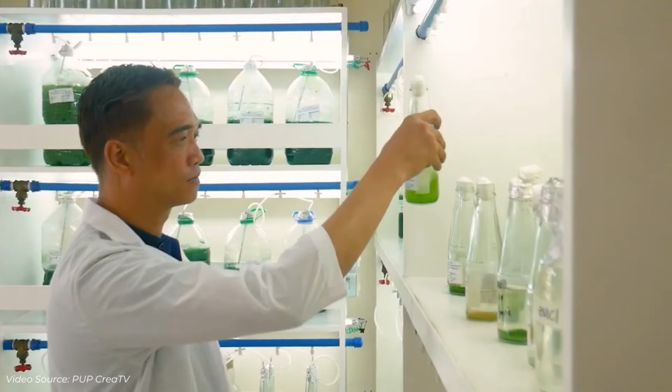However, the increasing number of out-of-school youth and dropouts was already a concern prior to the pandemic, and this issue was only exacerbated by the adoption of online learning as a result of the pandemic. In fact, the school dropout rate for senior high school students increased from 3.9% in 2018 to 6.6% in 2020.

And despite the rate of out-of-school youth decreasing to 20% in 2018 from 22% in 2017, the statistics are still troubling. There are about 16 various SUCs in Metro Manila: UP, PUP, PNU, and TUP to name a few. But there is no state-owned university or college in the northern part of Metro Manila.

In fact, the nearest SUC satellite branch to Caloocan City is PUP Quezon City, located in Don Fabian, Quezon City, while the nearest SUC main campus is UP Diliman in Diliman, Quezon City. To reach these state universities, you must traverse Commonwealth Avenue, which is notorious for its severe traffic, robbing students of hours they could have spent studying or resting.

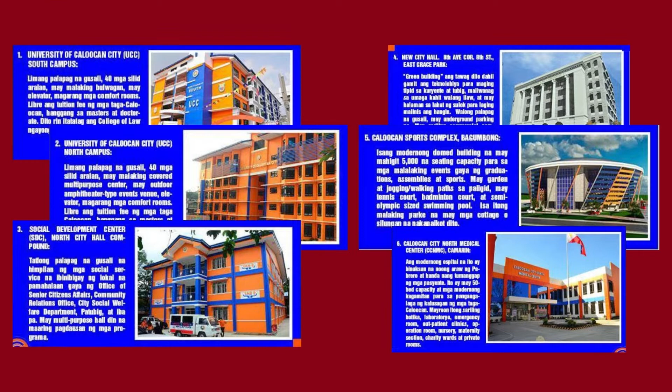As the client for this proposed project, the local administration of Caloocan City has continuously constructed initiatives that prioritize the needs of the people. Given that the major author of RA 11785 is also the current mayor of Caloocan City, it is almost certain that the objective and vision of the PUP Caloocan City North proposal would be fulfilled.

The project will focus on architectural programming and design solutions adhering to the related design guidelines and standards imposed by the law and CHED, with senior high school graduates, out-of-school youths, and college dropouts in the Kamanava area as its main beneficiaries. The project limits itself to the planning and designing of a state university and will not cover any structural, mechanical, electrical, sanitary, and other related engineering aspects unless needed for the architectural solutions.

The proposed site is a 14,660 square meter lot located in Congressional Road, a major road that connects to Camarin Road and Saranay Extension. Its primary modes of transportation are private vehicles, motorcycles, and tricycles.

Currently, there is only one jeepney route that passes through this road, but improvements regarding this matter are already planned by the local government.

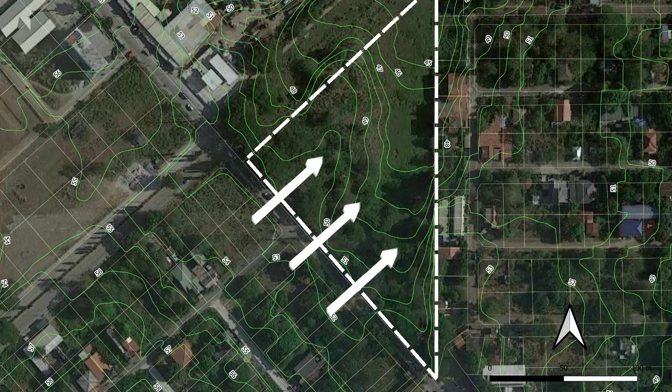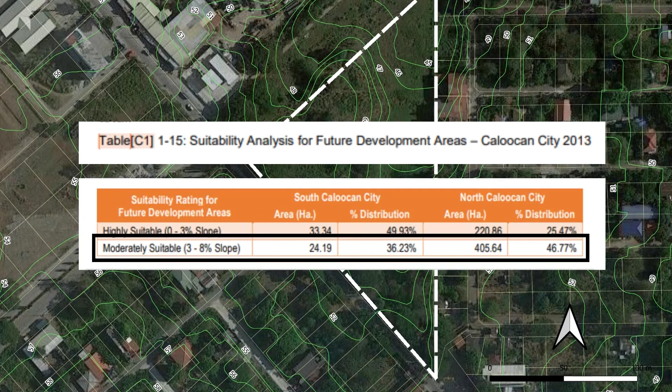The site is also near other educational institutions and residential areas, so accessibility and businesses that will supply the needs of the students will not be a problem. The lot has a gradual 6% slope downward from the major road and has low susceptibility for flooding. According to the suitability analysis for future development areas of Caloocan City LCCAP, the site falls under the moderately suitable rating. Its frontage is oriented southwest, which is utilized in the planning process. Various vegetation are also placed as a noise buffer from the neighboring settlements.

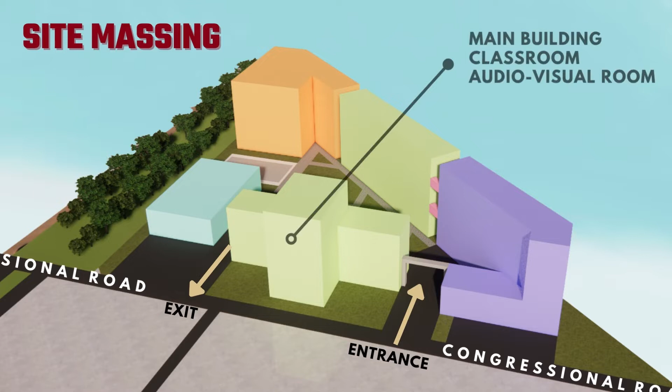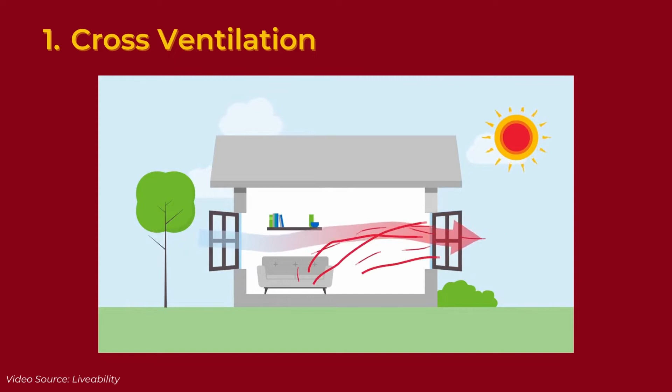The quality of air within the classroom is one of the most important factors to consider. Students' ability to concentrate is impaired when exposed to poor air quality, which also has the potential to harm their health. To fully utilize the natural ventilation of the site, cross-ventilation is applied. This is a natural cooling technique in which openings are positioned on opposing sides, allowing cool air from outside to enter while warm air from inside exits.

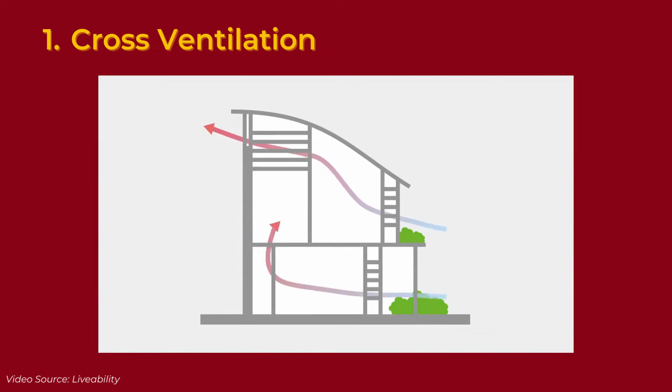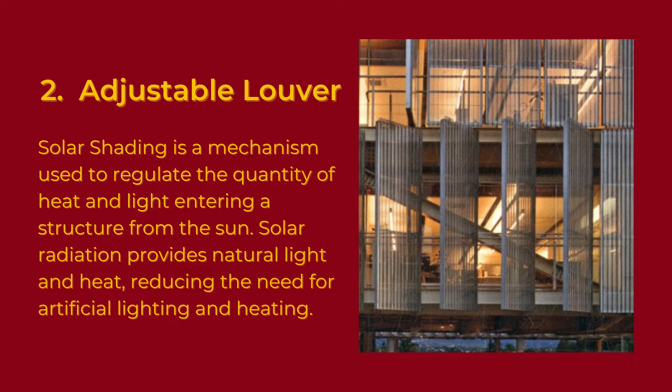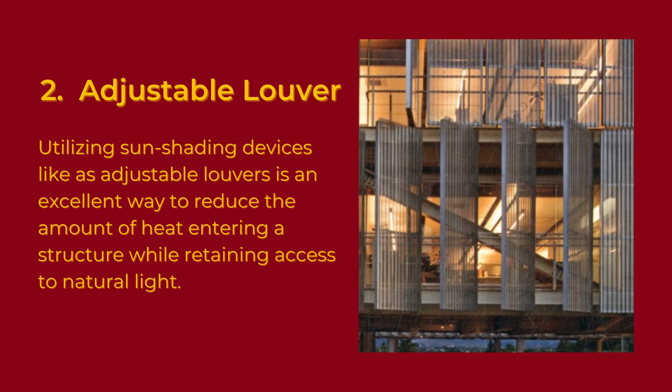Utilizing the lot's orientation to ensure the structure receives the most natural light is an effective way to save money on artificial lighting, but it also has drawbacks, particularly in the Philippines, where the heat can sometimes be too intense, affecting the comfort of occupants. Utilizing sun shading devices like adjustable louvers is an excellent way to reduce the amount of heat entering a structure while retaining access to natural light. In addition, louvers allow wind to pass through, enhancing ventilation in the building.

Rainwater harvesting is a technique of collecting and storing rainwater for reuse, as opposed to having it flow off, be absorbed by the soil, or routed into drains, streams, or rivers. Due to the large number of students, schools consume a great deal of water. Therefore, installing this system can help minimize the consumption of potable water and increase the use of rainwater.

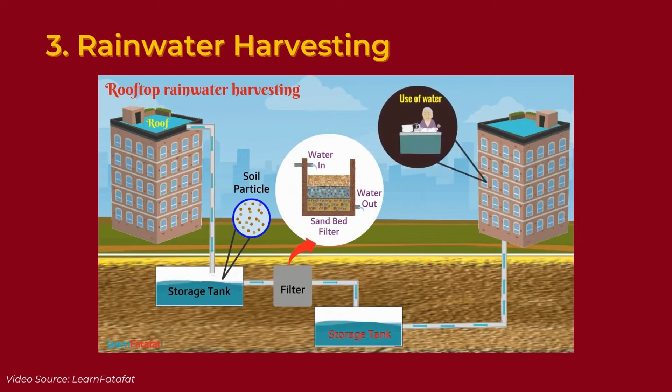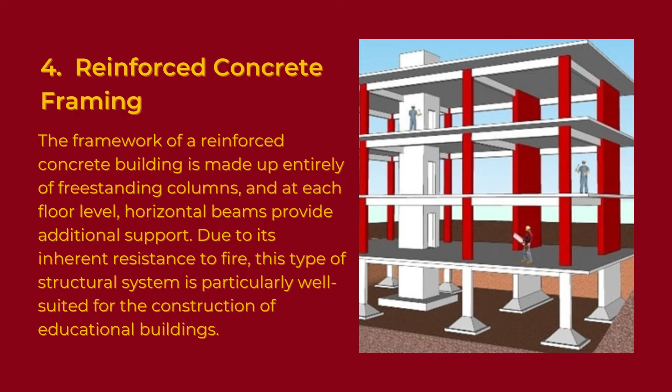The framework of a reinforced concrete building is made up entirely of freestanding columns, with horizontal beams at each floor level providing additional support. Due to its inherent resistance to fire, this type of structural system is particularly well suited for the construction of educational buildings, which typically house a large number of students and teachers, making structural safety and rigidity an extremely vital consideration.

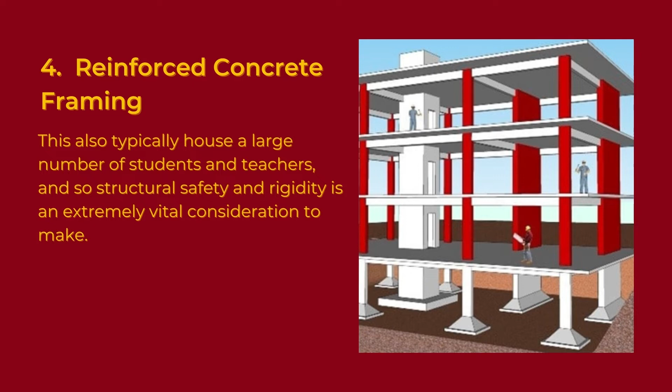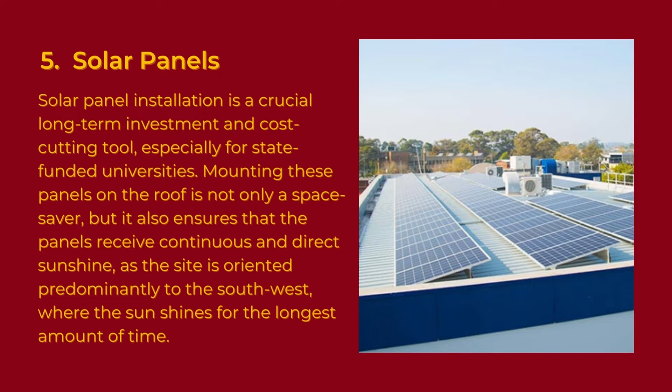Solar panels, also known as photovoltaics, convert solar radiation into electricity that may be used to power homes and businesses. Solar panel installation is a crucial long-term investment and cost-cutting tool, especially for state-funded universities, as it enables the university to redistribute the budget allocated to electricity bills to other projects.

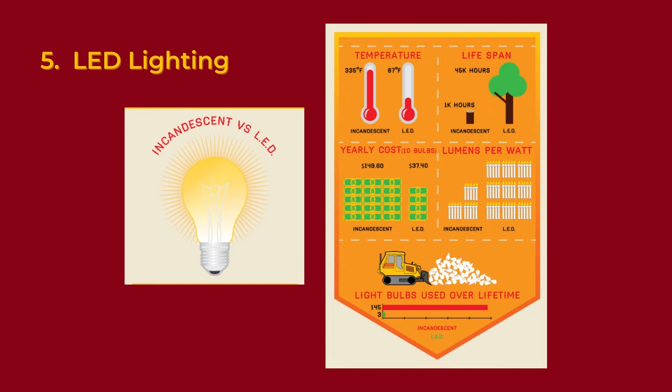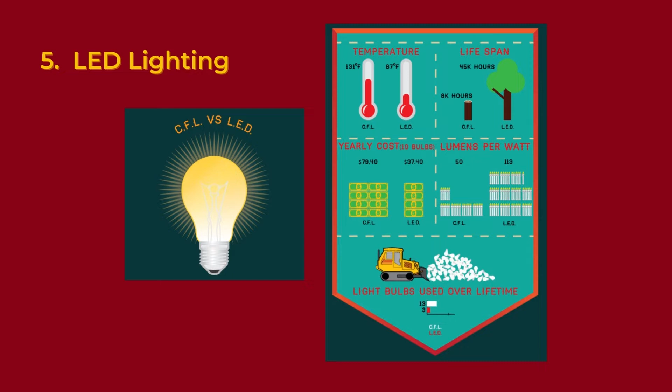A light-emitting diode, commonly known as an LED, is a type of semiconductor device that emits light through the electroluminescence process. The usage of LED lighting as opposed to conventional lighting contributes to a brighter and more comfortable learning environment for students. This is because LED lighting generates very little heat and does not contribute to the room's overall temperature.

An acoustic panel is a sound-absorbing panel that can be used to minimize the amount of reverberation and echo in a room, as well as the amount of background noise. Students can become easily distracted from their classes and lose their ability to concentrate when there is an excessive amount of background noise. Acoustic panels will be installed as a step toward achieving a conducive environment for learning.

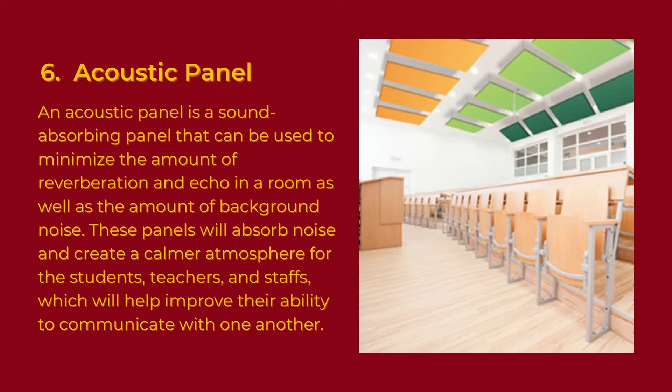Based on the average of the 10-year projected senior high school graduates divided by the 28 existing HEIs plus the proposed PUP-Caloocan City North, there will be about 1,198 students in Caloocan City enrolling in PUP-Caloocan City North. Meanwhile, it is projected that on average, over 300 students from the neighboring cities of Malabon, Navotas, and Valenzuela will enroll in the said university.

Based on the college programs with the highest recorded enrollment in Caloocan City for the past 5 years, PUP-Caloocan City North will possibly offer courses in accountancy and finance, business administration, computer and information sciences, and education, since these are the courses with highest demand in the city.

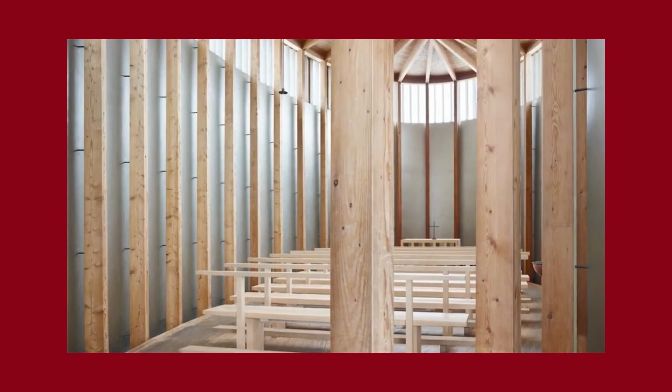Architecture is the art of reconciliation between ourselves and the world, and this mediation takes place through the senses. This project is developed and planned with this philosophy in mind, optimizing the architecture experience by including other senses besides sight.

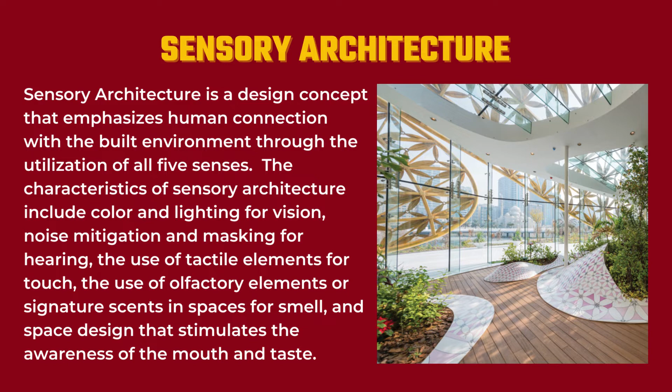Sensory architecture is a design concept that emphasizes human connection with the built environment through the utilization of all 5 senses. This architecture aids in the promotion of social, cognitive, and emotional growth, all of which are crucial in educational institutions. Not only does it help create a more favorable learning atmosphere, but it is also accessible to everyone, including those who have lost a sense, as they may experience the architecture with their other senses.

The form of the main building is derived from one of the symbols PUP is known for, the pylon. The pylon originally stood for true, good, and beautiful. The 3 pillars' positions were rearranged and came up with the form for the main building.

Stramp, or stair ramp, is a great innovation that encourages inclusiveness, particularly for persons with disabilities, as its ramps are not segregated from the stairs that people use but are instead integrated to create community.

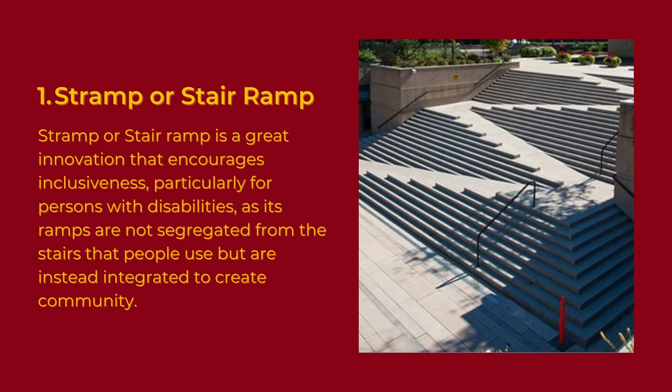Flexible desks also encourage students' interaction by allowing them to effortlessly shift and combine their desks anytime they are grouped or gathered. It also fosters a sense of community among the school, as no student or desk will be left behind because everything fits together.

Innovative napping or study pods shall also be installed in the library to provide students with a peaceful space to rest in the midst of an urban environment. This also promotes brain relaxation, which will help students obtain more focus and revitalize brains for class.

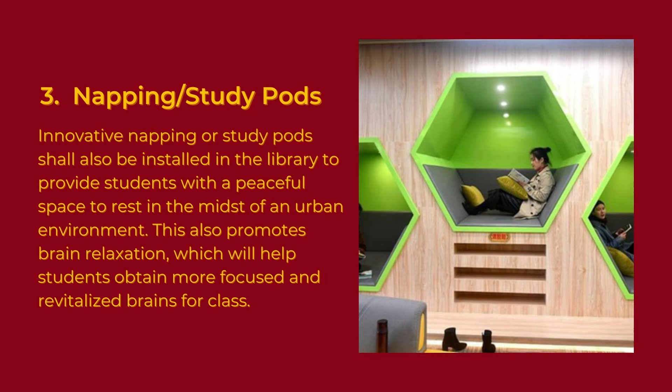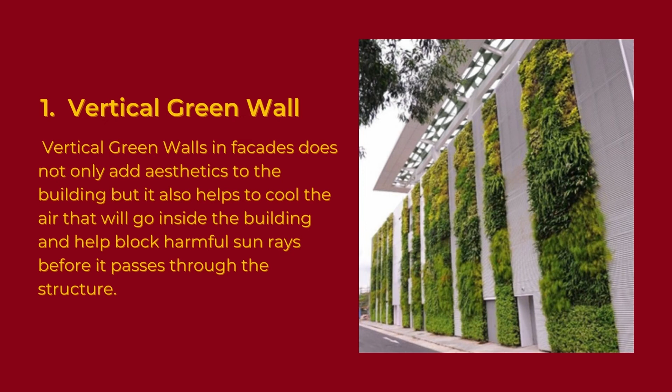One of the highlights of this project is the incorporation of vertical green wall in facades. This does not only add aesthetics to the building, but it also helps to cool the air that will go inside the building and help block harmful sun rays before it passes through the structure.

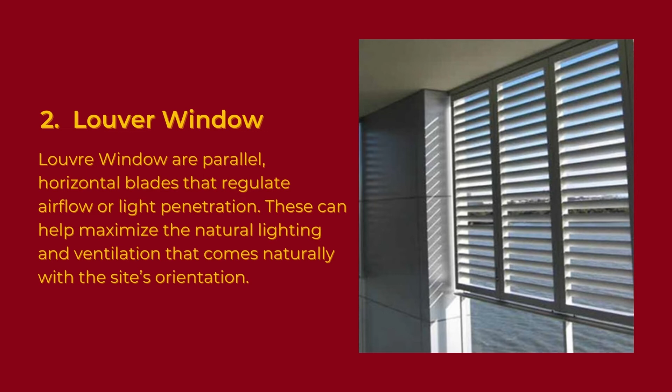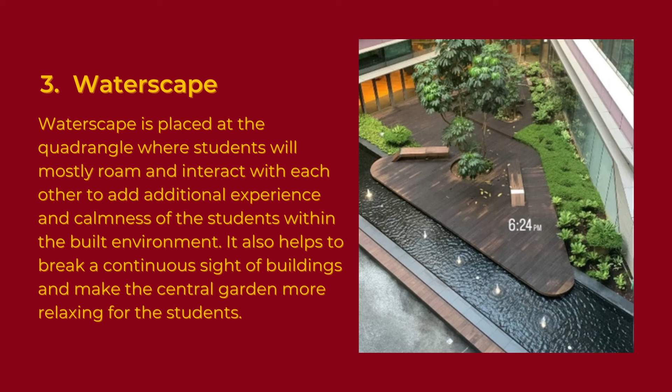Louver windows are also used, as it can help maximize and regulate the natural lighting and ventilation that comes naturally with the site's orientation. Lastly, waterscape is placed at the quadrangle where students will mostly roam and interact with each other for an additional experience and calmness within the built environment. It also helps to break a continuous sight of buildings and make the central garden more relaxing for the students.

There are 2 main materials that will be utilized in this project. Concrete, the most extensively used construction material, is composed of cement, water, and aggregate. This will not only serve a structural function but can also provide an aesthetic finish and add texture to the building.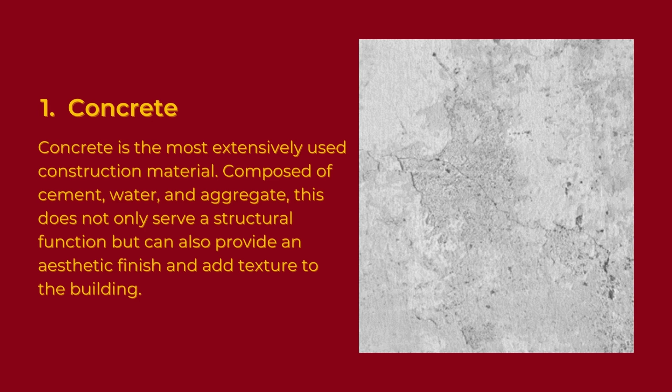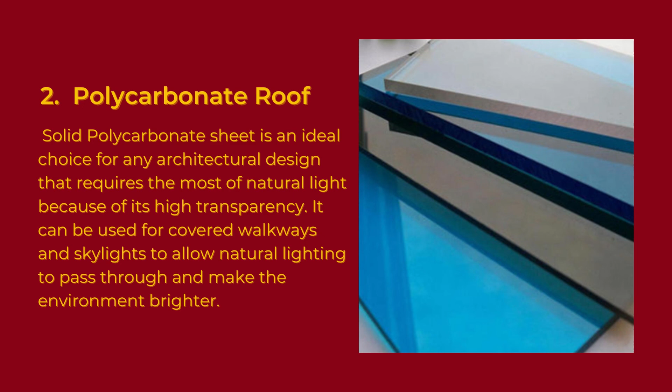And that concludes the presentation of my thesis proposal, Polytechnic University of the Philippines, Caloocan City North, a campus designed to improve students' mental health through sensory architecture.